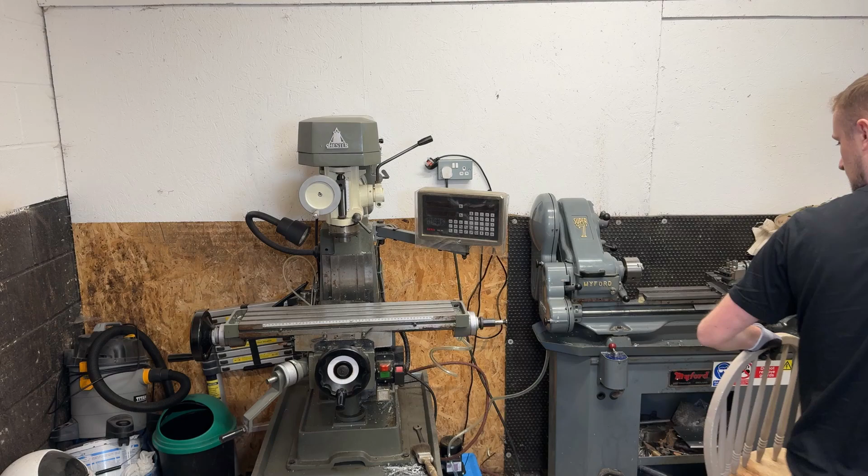Bit of backstory behind the project to start with. Recently, I did an intro to welding course where we covered MIG and TIG, and I really enjoyed it. I thought there'd be lots of applications for use back home here, so I went out and purchased a welding machine. We'll go over that, do a little review and go over some of the features on it.

But what I found is, at home, it's not a workshop set up for learning or welding, and I found that when I started welding, you'll see it later in the video, I'm on the floor all the time. Not only does it hurt my knees, but it's not comfortable. You can't get a good weld.

So what I thought is, we'll make a fixture. We'll go and make a welding table. So we'll weld the frame, we'll do a bit of machining, and I'll go over the ideas when we get to it in Fusion, with dowel locator holes in it so that way we can fixture your stuff off of it. And it's also got to be collapsible and tidy away.

You'll see when we go over to the workshop, there's not loads of room. So I've envisioned it going into a particular place and being able to be fully broken down when not in use and then built back up when in use. So that would be interesting - we've not done assembly stuff on Fusion before, so that would be really good to get into.

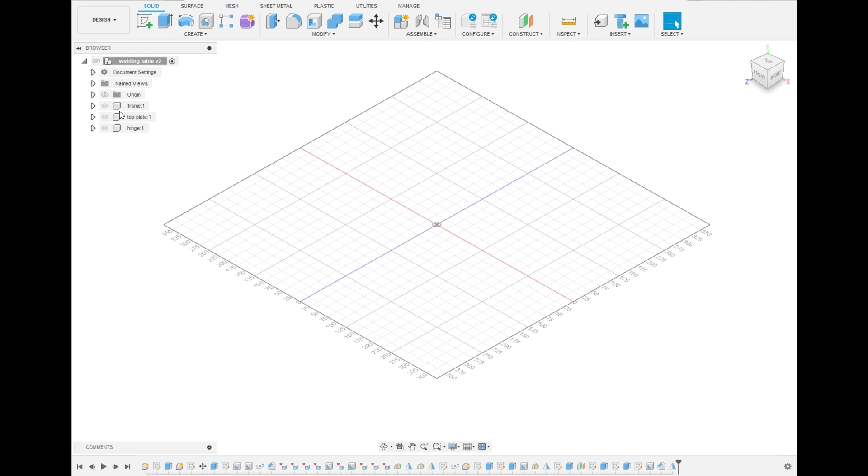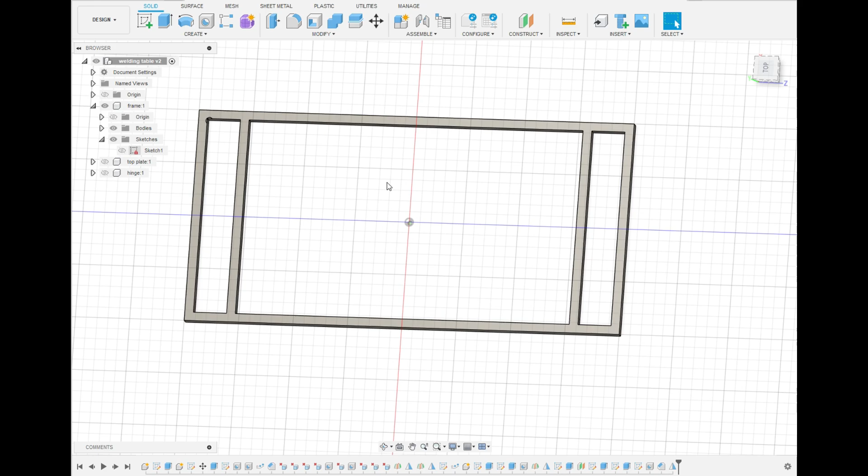So the frame we've gone with, as we can see, we started with our sketch, and with our sketch everything's dimensioned out. We've got our construction lines, then extruded it. That's given us our sketch - so that is what the frame will look like.

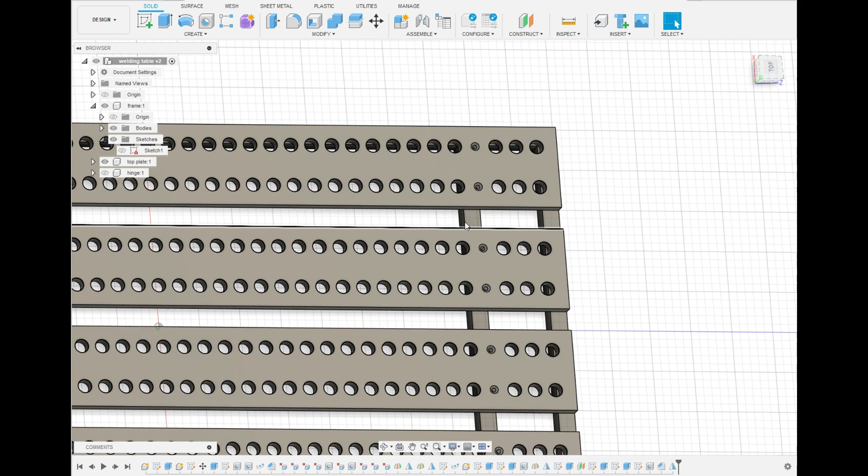And then on top of that, we'll have our plates. So our plates have been drilled out to our 16mm dowel holes - that's what all of these are. For our fixturing, we've got our countersink screws that will fix into our base plate, and everything's spread out, so it's going to be in this orientation.

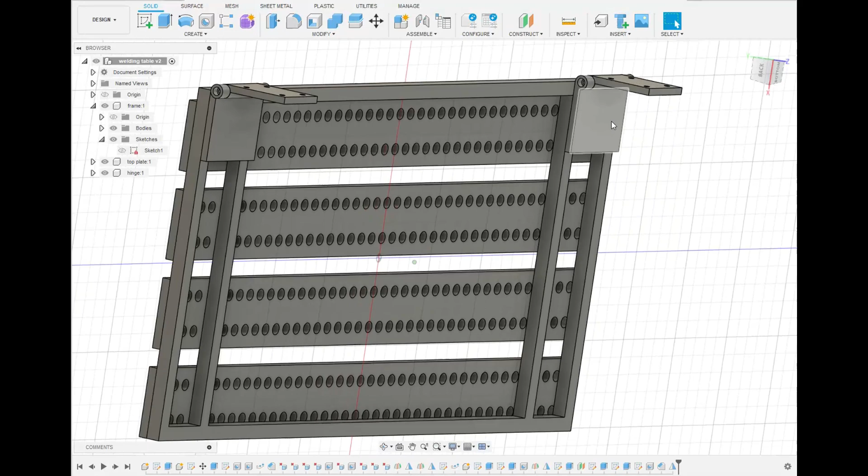I left this back bit here free, so that way when we get our clamps on, we can have some room to maybe put our clamps here if I change my mind. I've modelled a hinges model under here at the moment, but they will go on the wall. So this is so far what we've got.

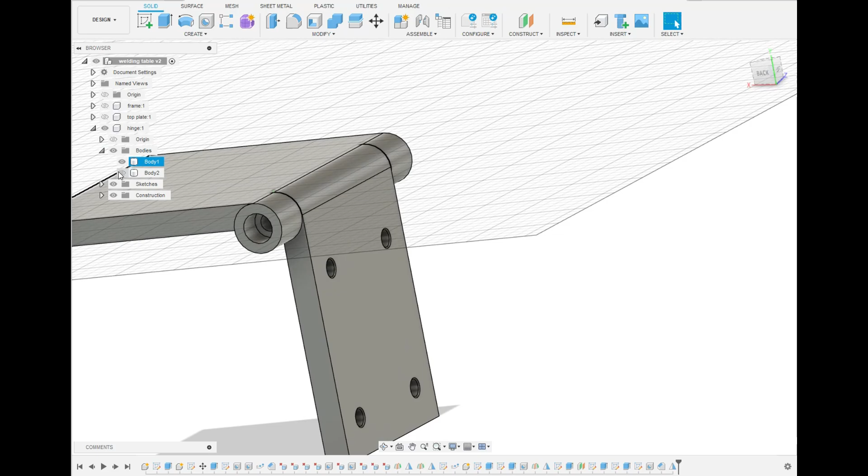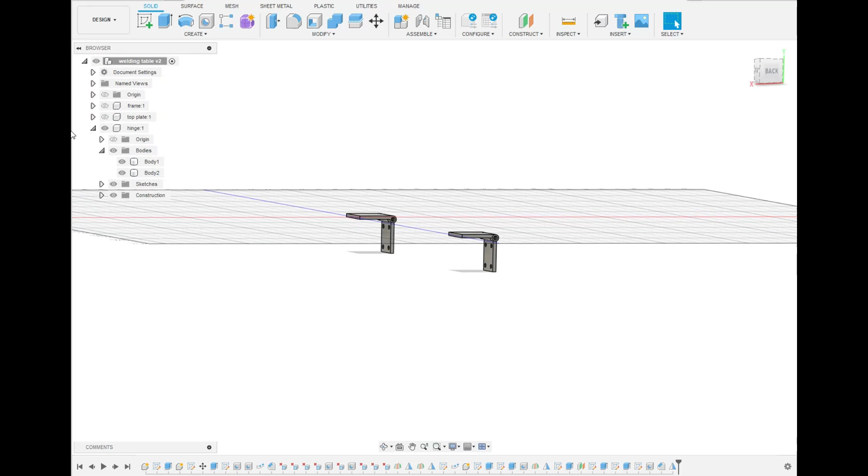If we turn everything off here, this might be the challenging part on the machine, getting these hinges right. There's a 16mm pin that goes all the way through, and it's counterbored on each side. We've got countersinks on mounting onto the wall, and that should allow it to totally collapse down when not in use, which is what we want.

So that is our model. What we'll then do is we'll go and make some drawings off of that and get on with it.

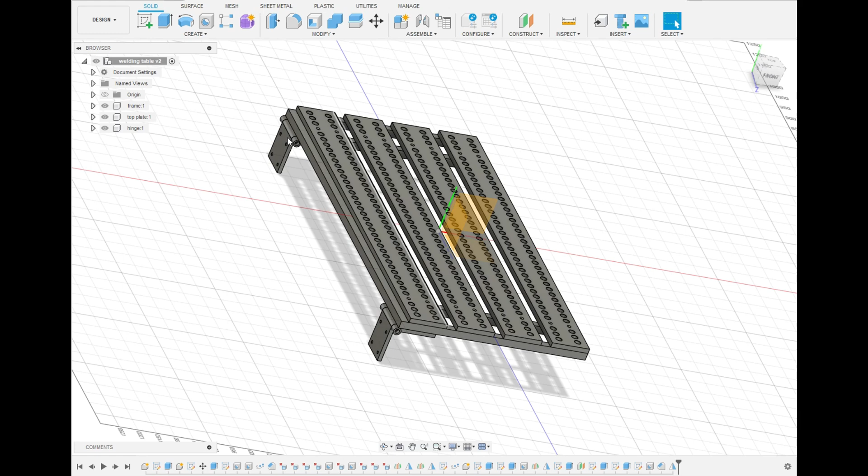So we've now got our top plate all modelled up. We've got our metre long by 100mm wide plate, 16mm dowel holes, and we've got 25mm space in between centres of each hole, with 100mm to our threads.

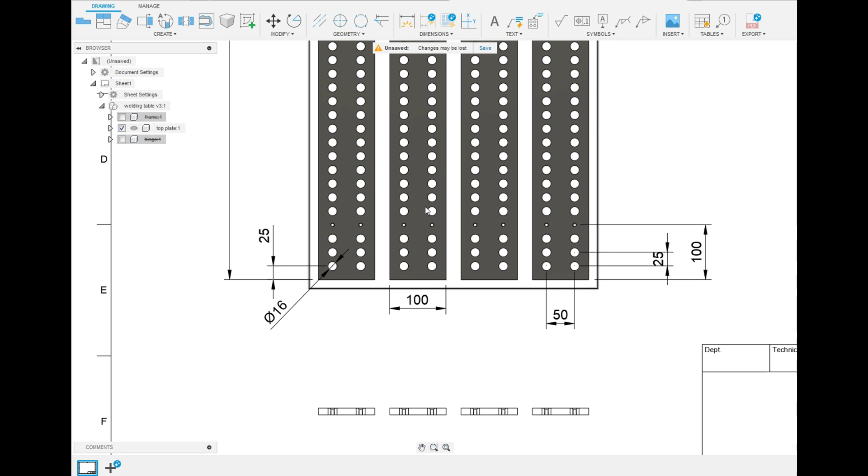What I do is I just add text here. There we go. So that's all of our thread.

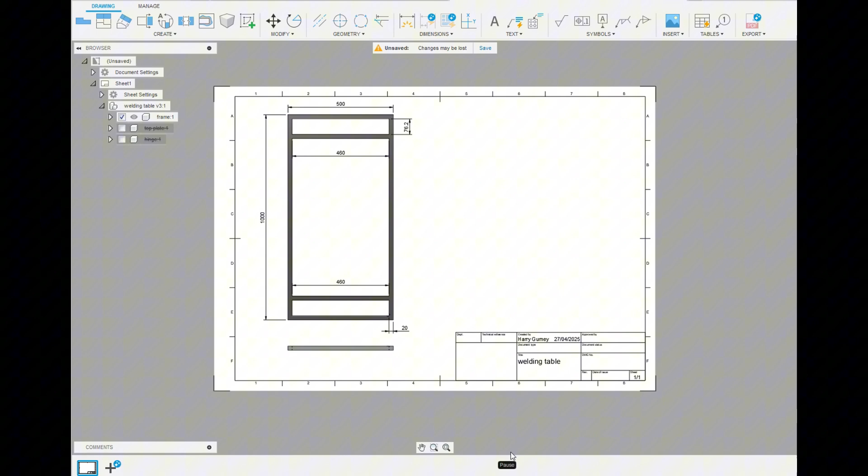So we'll now move on to our frame. The frame's a bit simpler, obviously, metre by 500, and we can see it's all already 460mm space in between them with a 76.2 gap.

Again, I have a feeling I'm going to add in a central weld to strengthen everything up, but we'll see when we get there, see what we think.

Right, as you can see, we're now in the workshop. This is the machine I decided to buy. It's a German machine, as you can see here. I'll put a link in the description below to where I bought it from. It was very reasonably priced.

At the moment this is set up to do MIG, because I've only got the argon mixed gas. I haven't got pure argon, so we haven't done any TIG with it yet. But it can do TIG, and it says it can do a high frequency start, without having to touch onto the part. We'll see how that goes a bit later once the table's been built and set up. But so far I've done a few small projects around the house with it, and I can't complain.

It's been a really, really strong machine for the price point. No real complaints from it. The people I bought it from were lovely, answered every question. I think I called them up 2 or 3 times, just making sure it was compatible.

It goes straight into a 240 volt outlet, so you don't need any three phase. No inverters or frequency converter, nothing like that. It just goes straight in, you flick it on, plug your gas in, turn it on, and you're almost ready to run. Making sure you got the right wire in, which I did because when I bought it, it's the whole kit.

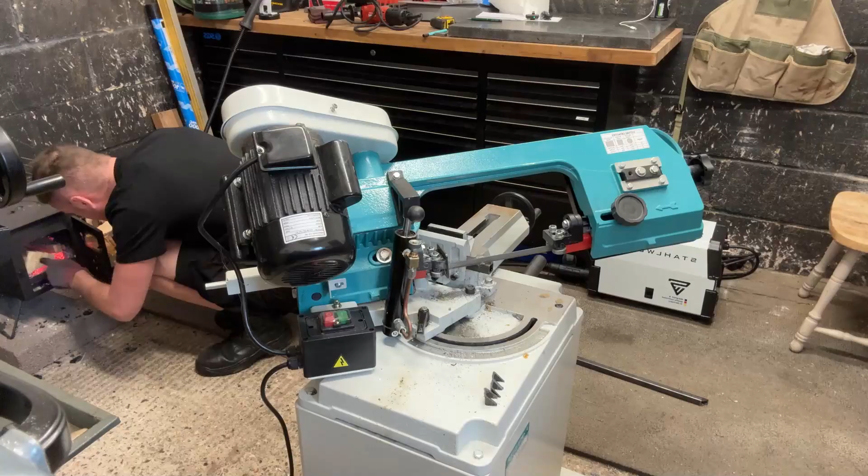Right, so we've got the main skeleton cut. What we're going to do now is move on, grind it up, roughly put it together to see that we're looking square and we're happy with everything. Then we'll get them tacked, and then we'll cut the rest. It's a bit back and forth, but that's how I want to do it.

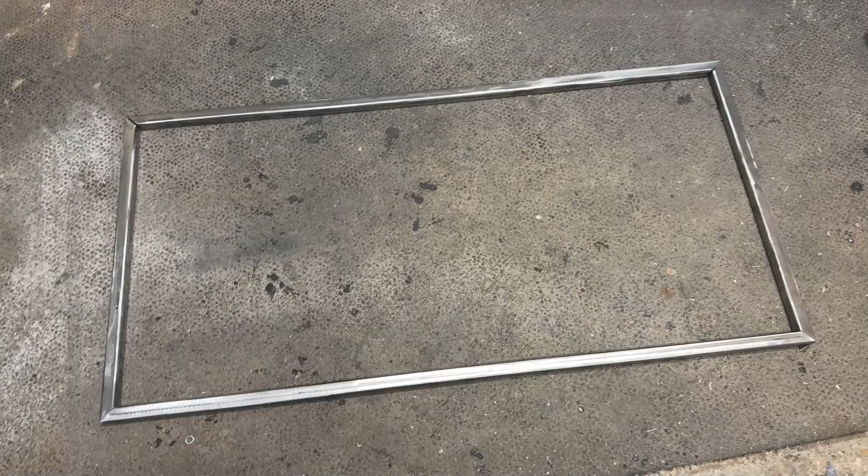So as you can see, everything's nice and grinded, so everything's clean. Square's looking pretty square. So we'll tack it all up, have a look how we feel, double check the measurements, and then we'll cut the rest.

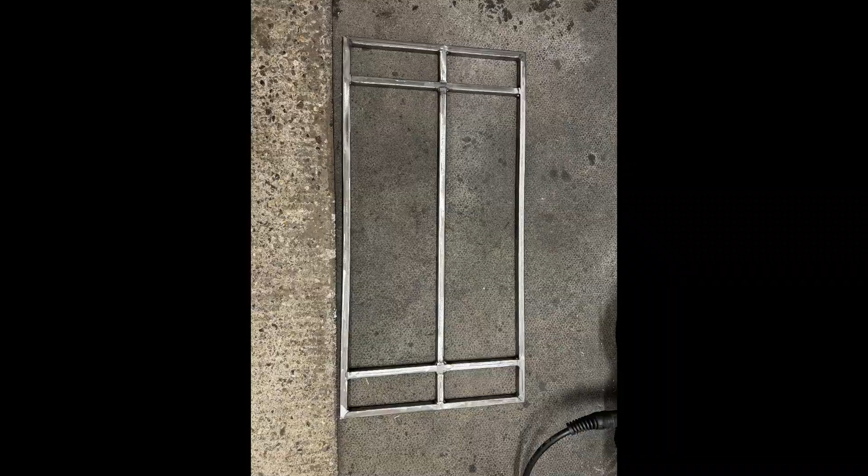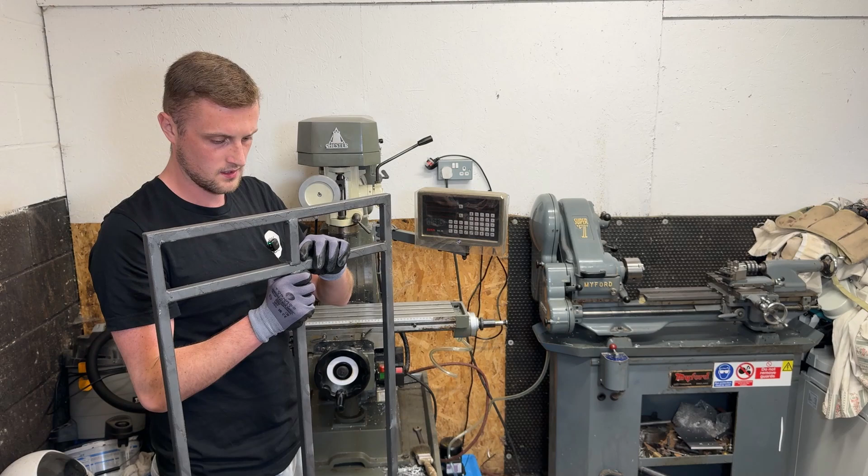So what we've got so far is our frame welded up. It's had its first layer of paint on. I'll give it a sand next and then put the final coat on, but it says it's weld through. I'm really happy with the weld so far. As you guys will be able to see when we do some close ups, but the welding looks really good. It's really penetrated into the part and it's solid, you know.

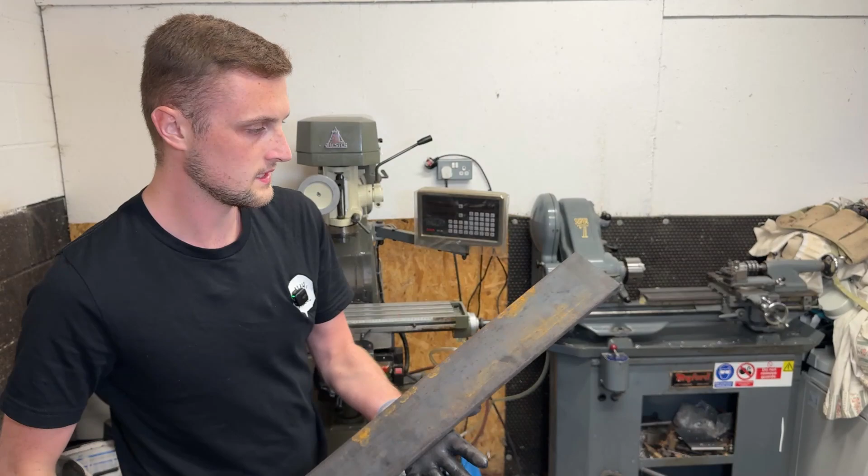What we'll do next is put this down, get our plates, which are over here. So we've got 4 of these metre long steel plates. What we'll do is they'll go on the mill. I'll set up a jig, which we'll also do in Fusion. We're going to drill our dowel holes and our mounting holes to the frame. And then we'll get on the mill and the lathe, make our brackets, and then mount it to the wall.

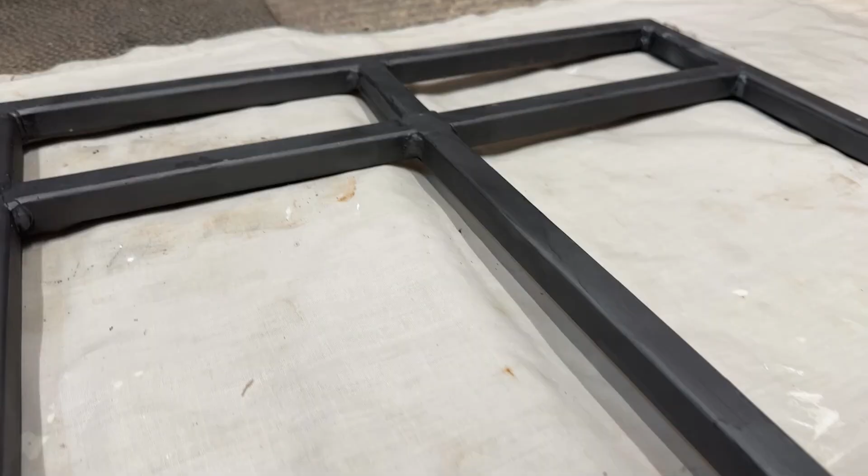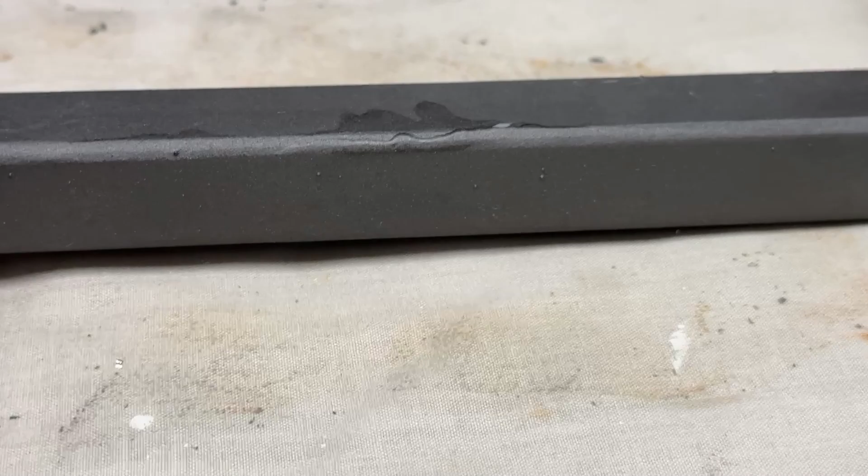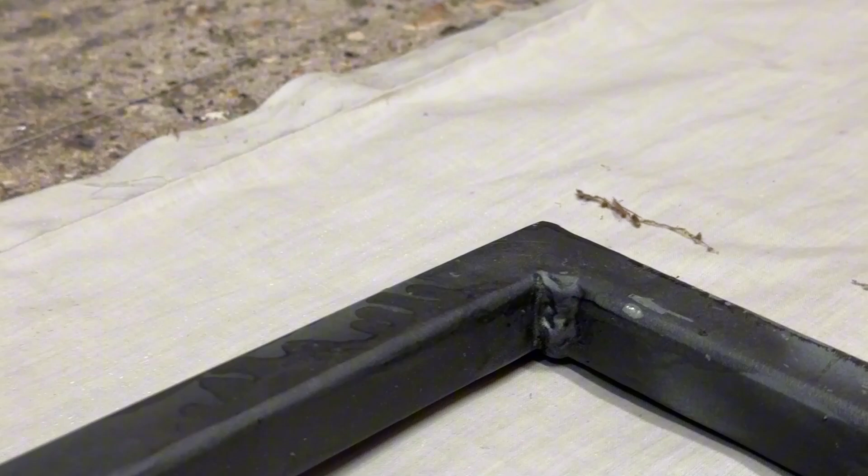I've attempted to put it on something white to help with the background, but if I zoom in here, I think I'm definitely getting more comfortable with the welder now. There's definitely some nice welds in here, and it's definitely solid, but for my first attempt that one's a bit iffy. But for my first attempt, I think we're doing all right.